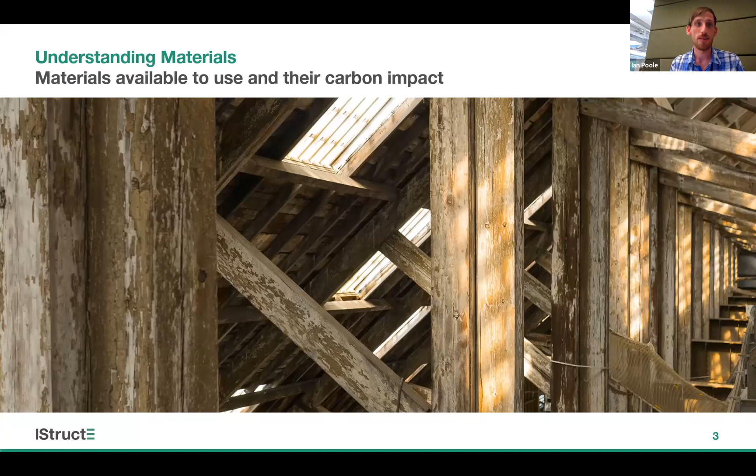I'm Ian Poole. I'm a Senior Engineer and Sustainability Consultant at Elliott Wood, and today I'll be talking about materials. Specifically, I'll be talking about steel and concrete. These are the materials we use the most, and I've only got 15 minutes. So let's start with steel.

Steel can be made basically using two methods. There's the primary method and the secondary method. So primary steel making uses coal and iron that we extract from the earth. It goes through a series of processes and ends up with a basic oxygen furnace, which creates the steel we need in our buildings. Secondary steel, on the other hand, uses scrap. So that steel that already exists, but has come to its end of life. We sort that and then we put it through an electric arc furnace. That turns it into steel that we need.

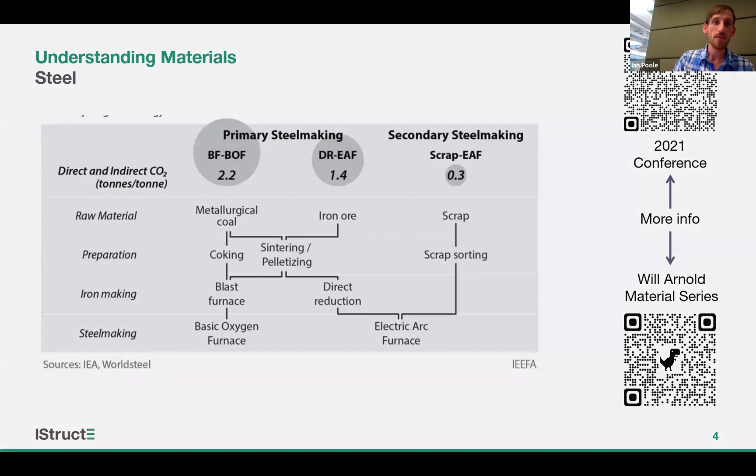The numbers on the screen show the carbon intensity, roughly, of those processes. And as you can see, the primary steel making route is much more carbon intensive than secondary steel, something between 5 to 7 times more carbon intensive. So we're in a climate emergency, we need to reduce carbon. It seems like a very easy opportunity for us to use secondary steel, reduce carbon emissions, and solve the problem. However, it's not quite so simple, and that's because we've only got so much scrap.

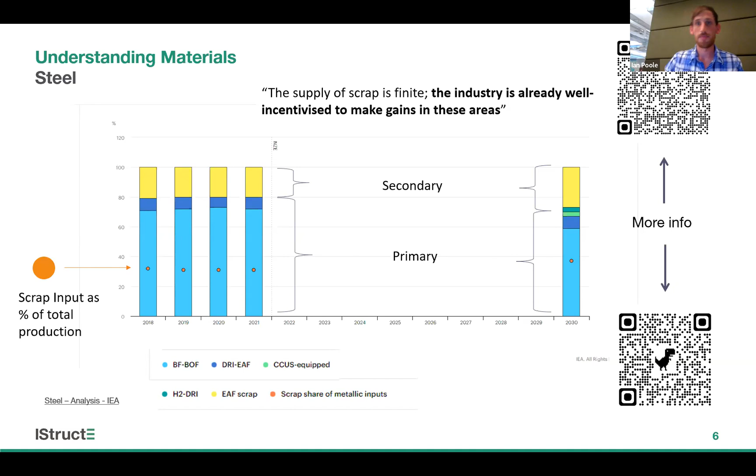So that's steel, but what about concrete? So concrete is a more complicated material than steel, but in carbon terms, it's actually quite simple. The majority of emissions associated with concrete are due to the cement, and specifically Portland cement. So we do have some things which can help us reduce carbon in our concrete mixes. These are known as other binders or supplementary cementitious materials, SCMs, and you'll probably have heard of fly ash and GGBS. Fly ash being a byproduct of the coal industry and GGBS being a byproduct of the primary steel making process, which I just explained. And when we use these in our mix, we can make carbon reductions. So a 50% GGBS mix can achieve up to a 50% reduction in carbon emissions.

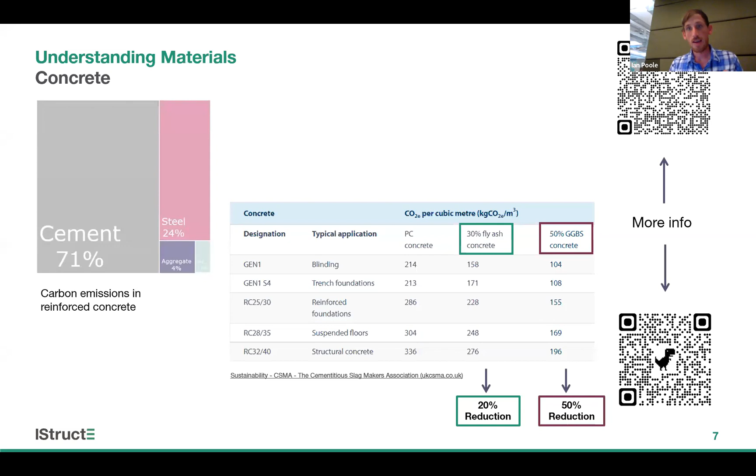Again, this all sounds really promising, but we have the same problem with concrete and cement that we do with steel and the availability of scrap. Sometimes there just aren't enough rocks, and in this case, there aren't enough of these other binders, the fly ash, GGBS, etc. And to give a numerical example of that, cement production globally last year was over 4,000 million tonnes. Of that, only 260 million tonnes was GGBS, so less than 10%. And that's only expected to grow by about 0.1%. So we're in a similar situation with scrap. It's already incentivized and there's not enough of it.

And what that means in terms of carbon emissions is that because our demand is still going up, the carbon emissions per tonne of cement produced is actually still going up as well. Essentially, we've only got a certain amount of this low carbon stuff. Everything else has to be produced using Portland cement, which is higher carbon. And with a lot of graphs that you'll see around carbon emissions, it's following a similar trend of we need to significantly reduce quickly, yet we're still going up, which is obviously an issue.

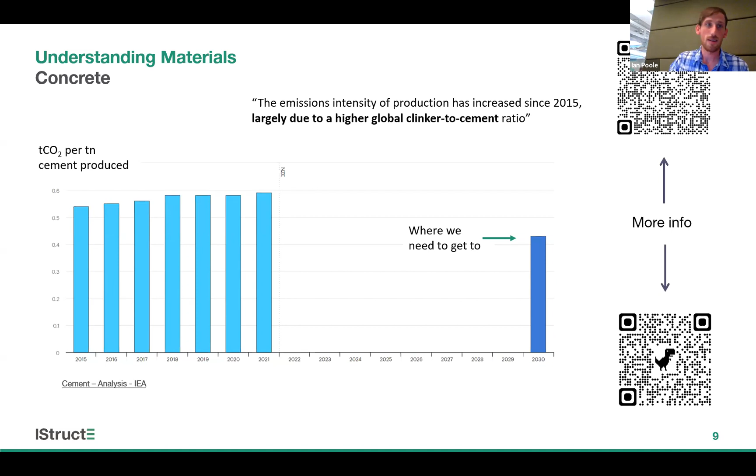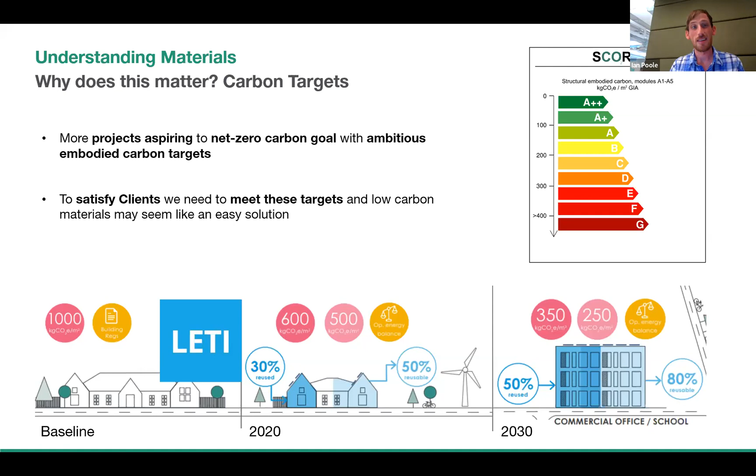So this is all very interesting, but why does it matter? And it matters mainly because of carbon targets. So carbon targets in general are great. It's great that now more projects are aspiring to net zero carbon goals or ambitious embodied carbon targets. And that's thanks largely to a lot of the work that LETI have done, the IStructE through their SCORS system and others. However, it does mean to satisfy clients, we need to meet these targets, and low carbon materials may seem like an easy solution to do that.

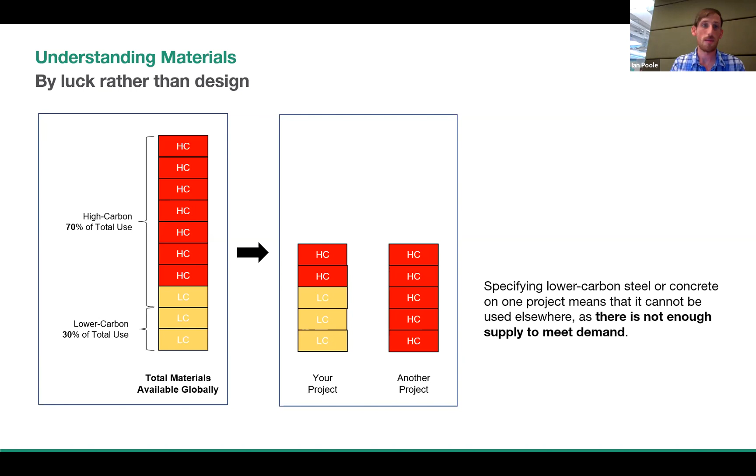However, the problem is we've only got so much of those low carbon materials. So if I specify them all on my project, then all it means is another project isn't going to be able to use them. So there's not a net industry gain, even if your carbon emissions for your project look better. And so we reach this issue really where we've got project emissions, which is what we focus on, versus industry emissions, which is what matters. And reducing your project emissions through low carbon materials doesn't actually help in any way towards industry emissions. So it's neutral at best. What I've actually seen over the last few years is increasingly that it's having some negative impacts. So I'd just like to talk through some of those concerning trends.

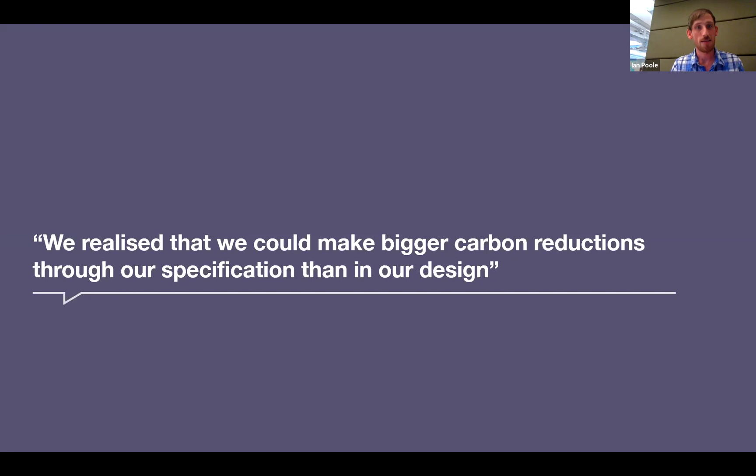I'll start with a quote which I heard at a really big event a few months ago, and this was a structural engineer that said, "We realise that we can make bigger carbon reductions through our specification than in our design." This is obviously concerning, especially in relation to what Eva's just said and the hierarchy on screen. We know that by far the biggest impact we can have is through using our design skills to use less stuff, to design more efficiently. We can do a little bit with the specification, but nowhere near as much as we can through our design.

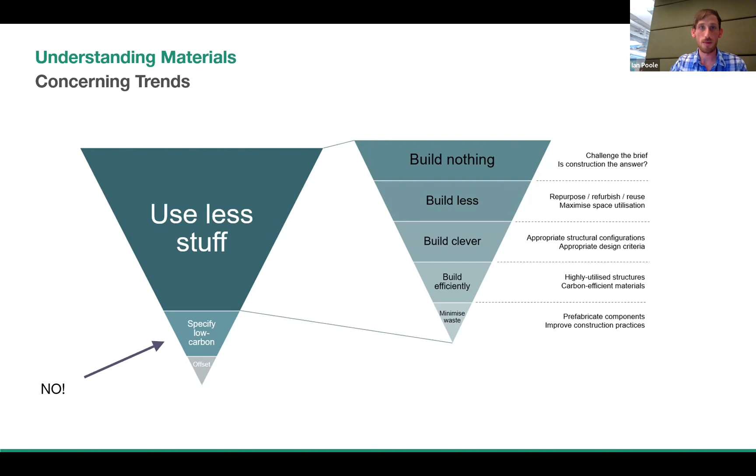And this is how it normally plays out on a project. So an ambitious embodied carbon target is set, and then that is met by using low carbon materials, and that's used in the calculations in the design. So design is looking good. It looks like it's going to meet the targets. We can tell the client that everything's okay. But there's a real reduced incentive to actually challenge design decisions, do things differently, optimize material use. And so there's that missed opportunity to use less stuff, which is a big issue because it's what engineers are good at.

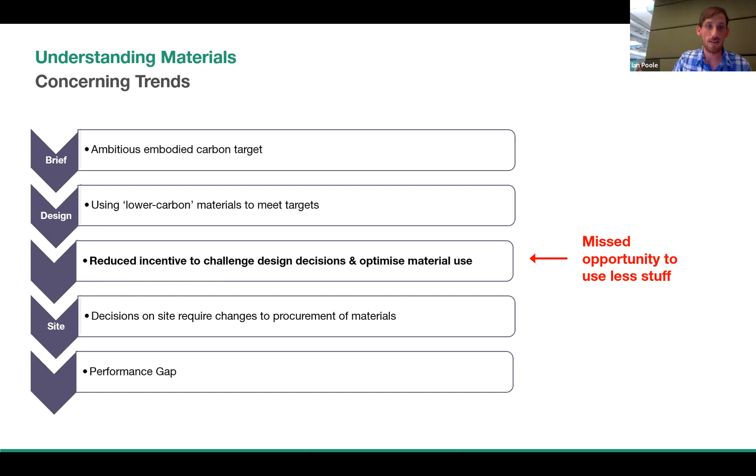And so what then happens as the project gets to site is that emissions may go up in terms of the actual building compared to what you think you designed. And that's known as the performance gap, which is a common term used in operational energy. And I think we're starting to see it a lot now with embodied carbon as well. That can be for numerous reasons. But first and foremost, if we're specifying high amounts of stuff that are a finite resource, which is in high demand, it's going to push the price up. And the client won't always want to pay that. At the same time, we know that when things get to site, things change. Program might drive some decision making, and all those changes can end up resulting in more emissions.

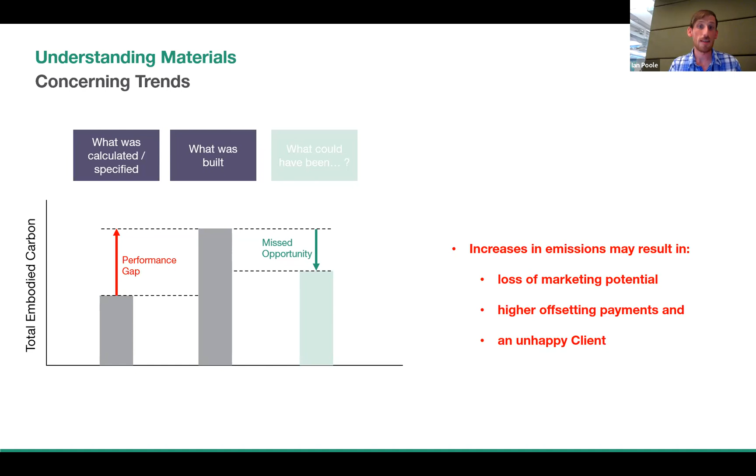And the green bar there shows what the missed opportunity was. If we designed it better, if we focused more on carbon reductions in the design, then we'd have achieved a better outcome. And thinking forward a bit as well, as more standards and accreditation systems enter the market, increasing emissions may result in loss of marketing potential, missing out on those standards, or higher offsetting payments. So again, that's going to result in an unhappy client.

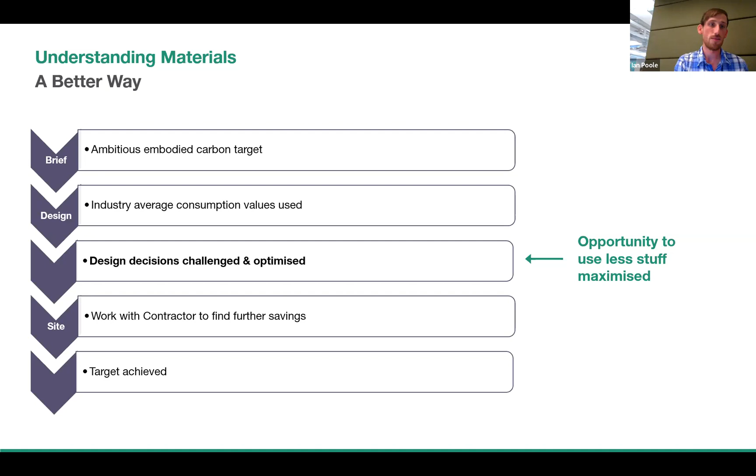So what's a better way of doing this? So I still say to set an ambitious embodied carbon target, but then use industry average consumption values to guide your design all the way through the design process. This will mean that you select the correct materials, the best materials in the best place. And then it will also drive you to find opportunities to use less, to maximize your skill set as an engineer, and to really challenge the client to make different decisions and better decisions around design. Design out the transfers, the cantilevers, tighten the grids, etc. And then hopefully that means you'll meet your targets and have both a project and an industry benefit. So we must take caution in single-minded approaches that prioritize an individual project over the wider industry benefit.

I'd like to just move on now and talk about some specific examples where we can have negative impacts outside of our project. The first few are around GGBS. So this is a very valuable binder, and it has been for a long time on large infrastructure projects and in hot climates because it helps to control crack widths. What that allows us to do is essentially use less reinforcement in our designs in those systems, so tunnels, dams, basements, etc. If we start using that GGBS in our buildings where it's not providing us with any performance benefits, it takes that resource away from being used where it's needed. And so on those projects, they'd have to increase their reinforcement. So this therefore means more stuff is used, and we've had a negative industry impact.

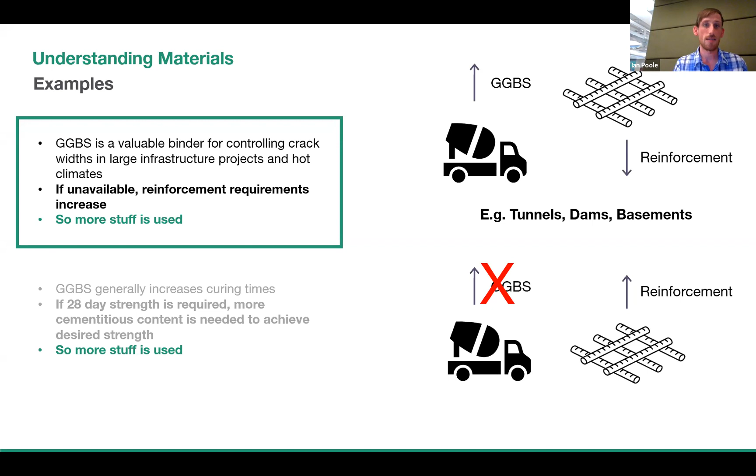The next example, again sticking with GGBS, is around curing times. So the graphs on the right of the screen there show that basically as we increase the amount of GGBS in our mixes, the amount of time it takes for that mix to gain its strength increases. So really, GGBS is very incompatible with early age strength requirements. If we do need early age strength and we put a lot of GGBS in our mix, we basically have to over-design that mix, put a lot more total binder content in to achieve the strength at short-term gain, and then that concrete will be much stronger than we've actually designed it for. So we've wasted material, we've used more stuff.

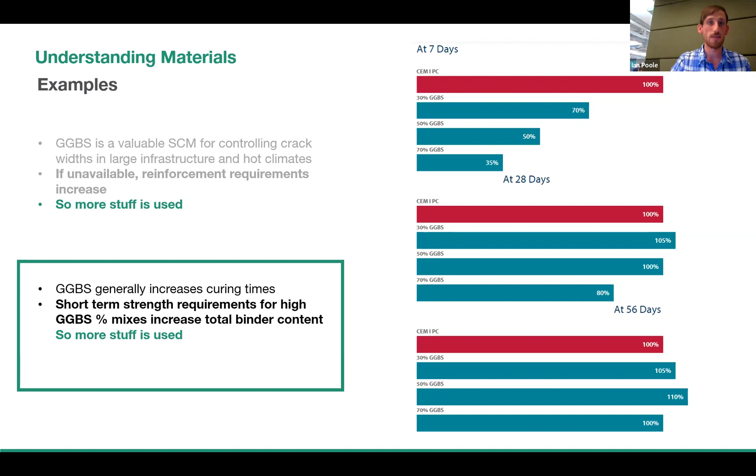The next example is around transport emissions, and this applies to both steel and concrete. So with steel, we basically in the UK produce much less than we need. We then export half of it and then import about twice as much as we export. So in doing that, we're releasing a lot of carbon into the atmosphere through transport, which isn't strictly necessary.

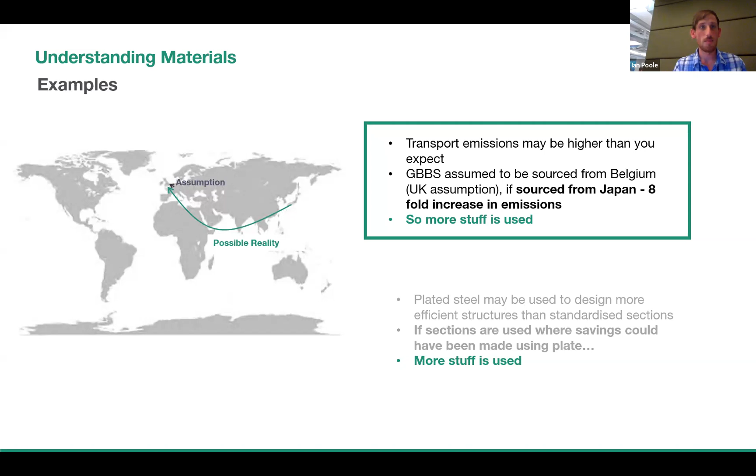In the case of GGBS, it's actually a bit worse in that in our calculations, we actually assume that the GGBS is sourced from Belgium. So this is baked into the A1 to A3 value that you'll use if you use the IStructE tool or the ICE database. But we know that we import GGBS from as far as Japan, which is basically on the other side of the world. And when we do so, there's an 8-fold increase in emissions. So more transport emissions, more fuel, more stuff is used.

And the final example I wanted to talk through is with steel. I mentioned at the start of my presentation that we have primary and secondary produced steel. Now, in theory, these can both be used to make any product that we need, but the reality of the industry is that secondary steel production is used predominantly to produce reinforcement and some open section steel.

And what that's led to in the last few years is that there's been a shift away from using plated steel, which is typically only produced using the primary method, to using more section, because then we can specify secondary steel, get the carbon gain associated with that, and the carbon looks good on our project. That's really damaging if that change has resulted in more material being used. All that secondary steel is going to be used across the industry anyway.

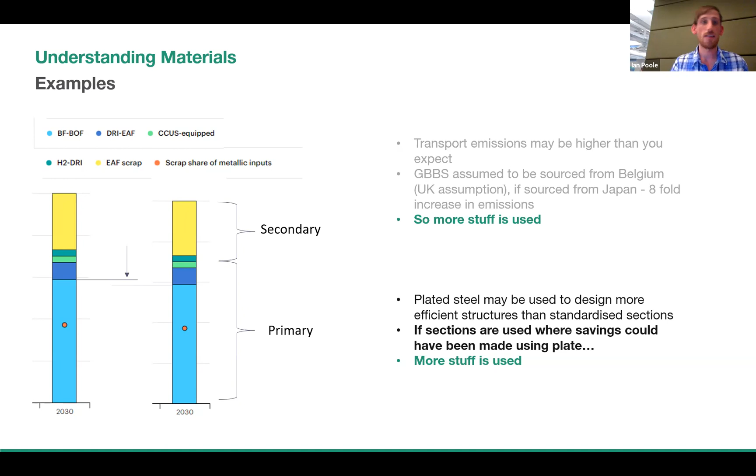So if you can make savings in your design through using plated steel, then it's going to have a net industry benefit. As you can see on the graph there, we reduce the amount of primary steel that we need. All the secondary steel is still produced, it's just used elsewhere. So other people essentially benefit from your decision.

So finally, what can we do? So there are things we can do with materials to have a positive impact and put that into our specification. So there's been a lot of amazing work done by SteelZero and Responsible Steel over the last few years to create the graph that you see on screen, which is basically the carbon intensity of steel making across the world based on the scrap input. And you can see there's a linear trend there.

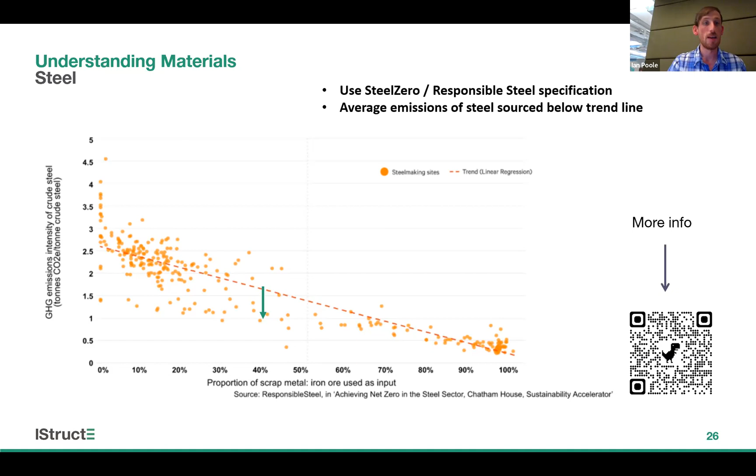So instead of specifying a certain production route or amount of scrap input, if you simply specify that across the project, the average carbon intensity of your steel must be below the line based on the scrap input, then that'll have a much more significant benefit to industry. You can help ratchet that down and accelerate towards net zero.

Going on to concrete, there's a similar initiative that's been carried out by the Low Carbon Concrete Group over the last year. And they've produced the graph on the screen, which shows carbon emissions against strength class on the x-axis. Unfortunately, this graph doesn't take into account the specific mix. So as you can see on screen there, if I specify in my projects that every concrete mix has to achieve an A grade, all I'm doing is basically saying that about 70% GGBS has to be used, which, as I've said, isn't really the solution. So you do have to tailor this to your mix.

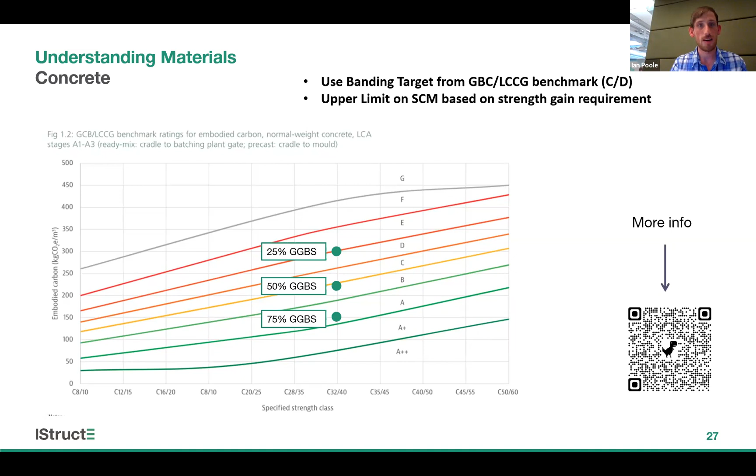So how I'd recommend doing this is if you've got, say, 25% GGBS as your standard requirement on the project, you could specify for those mixes that an average of D or maybe C has to be achieved. And if you have got any places where you're using a higher mix for whatever reason, then adjust the banding accordingly. So a 50% GGBS, maybe specify B or A.

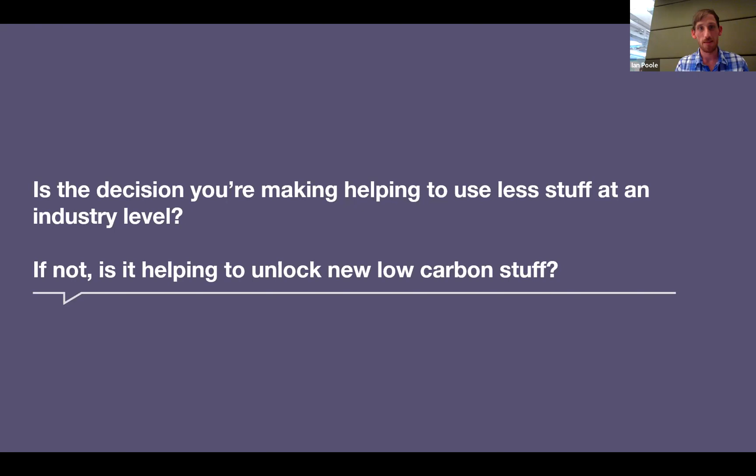So the question I always ask myself and try to use to guide design decisions is to ask, is the decision you're making helping to use less stuff at an industry level? And if it's not, is it at least helping to unlock new low carbon stuff? And I think this is a good thing to have in mind in general throughout our design process.

Ian, you have one more minute.

Thanks, Arno. I mentioned that there's a lot of disadvantages to specifying low carbon materials, but I do have to cover the other side of the argument. So what are the advantages? And for me, they're threefold. The first one I've already mentioned, if the specification reduces total material use, then that's a good thing, and we should definitely be using it in those cases.

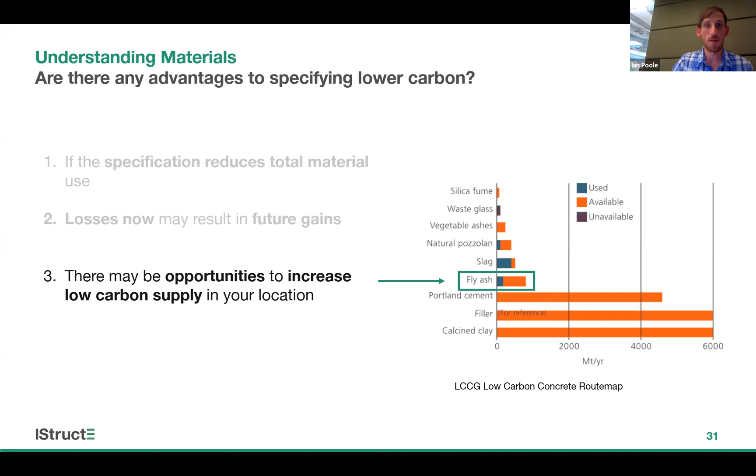The second is where losses now may result in future gains. This is a lot more complicated, but a good example of this is with AACMs, where we've got a new technology, it's inefficient now, it's not currently having a positive benefit, but it may do in the future. And finally, there may be opportunities in your region to increase low carbon supply. A good example of this is with fly ash, where I think there is a bit more to be used than we currently use. So if you're in a region where there's a lot of coal making, then specifying more fly ash kind of makes sense.

So finally, I think our job as engineers in the climate emergency is to provide what society needs. And that's not necessarily what it wants or just because we can, but what actually gives value to society with as little material as possible. If we use as little material as possible, we'll decarbonize more quickly, and we'll reach net zero quicker with lower total emissions, which will benefit everyone and everything on the planet.